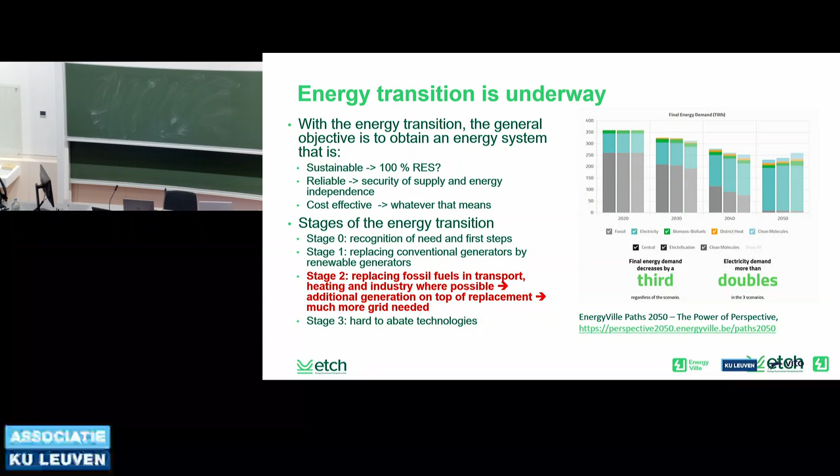If we look at what the system will look like in 2050, we'll go from a system that is currently three-quarters fossil fuels in primary energy consumption, to something that is largely electrical. It will consume less, but it will be double the amount in electrical. If you look at where we need to go, it's going to be vastly expensive—that means you have the opportunity to earn good money, but that's probably not the most important thing, although maybe an interesting side note.

Where we need to go, if you look just at the North Sea and we assume 5 gigawatt links, we get spaghetti. What we did in the past is develop the grid, because that's more cost effective, more reliable, and in the end leads to a better sustainable system. So we basically make a DC grid out of that, and then we need to import it on land as well.

For that, we need to invest for the next 15 years about 31 billion per year in transmission, just transmission. It's nice, it's good, huh?

In order to make sure that we get our undue share, as Ronnie sometimes called it, that we get more than what we purely, mathematics-based, deserve, because we are at the forefront.

Flanders actually established the Energy Transmission Competence Hub, which is part of EnergyVille. Our vision is that the future transmission system shall be multi-gigawatt, power electronics based, and underground. Why underground? I need to explain this to engineers all the time.

There are people that don't like overhead transmission. Yeah, it's the case, it's true. That being said, this is not going to be simple.

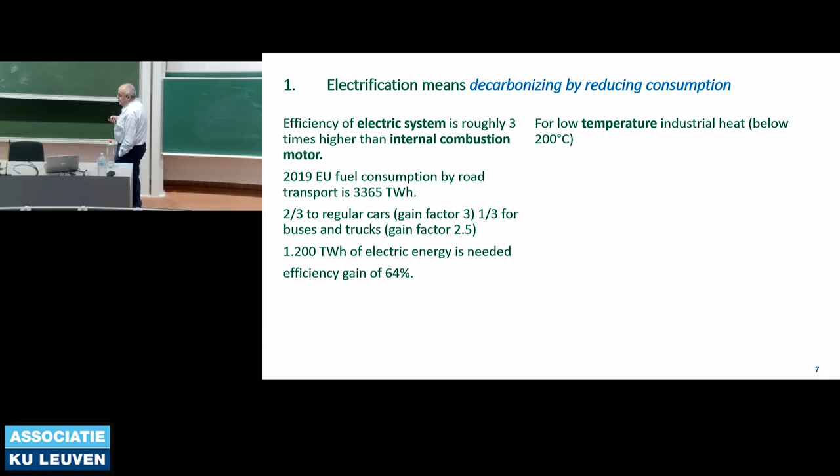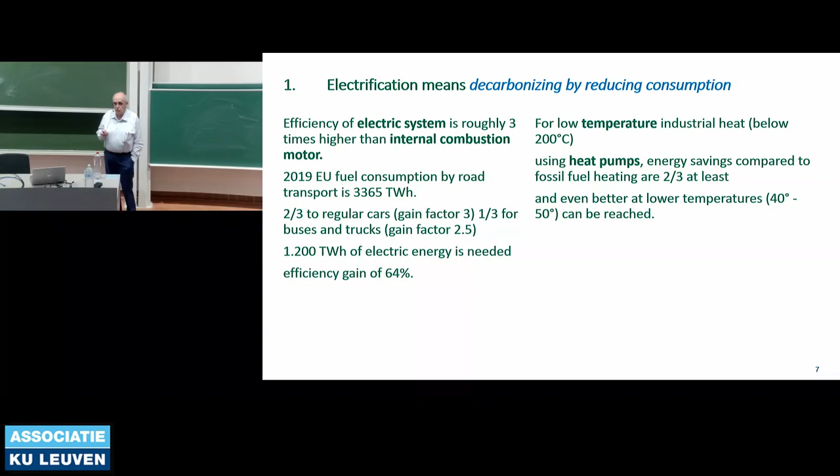So if you look at the overall thing for low temperature industrial heat, for heat pumps, using a heat pump again requires only one-third of the energy for industrial heat at 200 degrees. So again, if you only want to go to 40 or 50 degrees, for instance floor heating, you only use one-fifth. So energy-wise, if you have electricity, you use the electricity, and it's going to consume much less.

Electric cars are booming. Electric buses, trucks, no problem. A trans-European network with 1,000 electric charging points is being set up. And if you look at the whole thing, we will see it flying over the next years.

Are we going fast in Europe? The answer is no. We pretend to be fast, but it doesn't work quite well. In China, in 2022, 28% of the final energy use was supplied by electricity, and growing—it's now around 31-32%. The industry is the largest consumer in China, with 59% of the demand being electric. In Europe, and the US is lagging, we have 22% of the final energy being delivered by electricity. But as I told you, if there is a 10% difference here, you have to multiply that difference by 3 to see the reduction in fossil fuels.

So China is fully electrifying. China is consuming far less petroleum these days. And if you look at the industry, it consumes 36% of the electric energy, and it's really not enough. The electrification of the industry in Europe is not really up to speed.

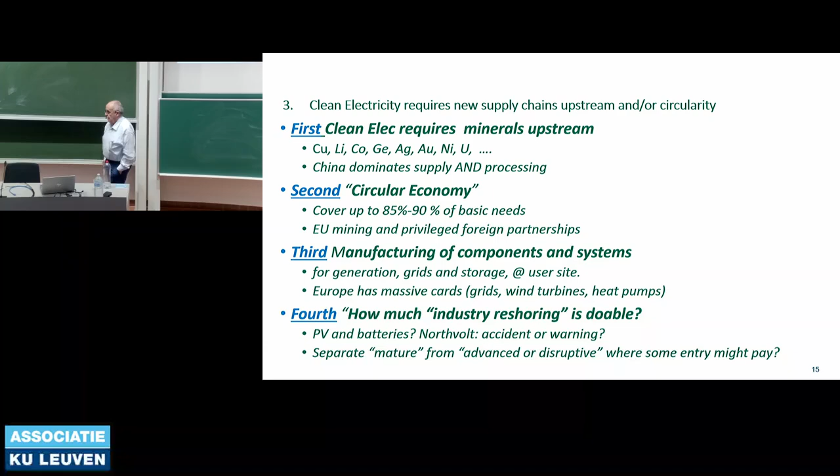So what do we need? We need minerals, minerals are there. We need circular economy: whenever material gets into Europe, don't let it get out anymore. Recycle it. That's different from fossil fuels, because once you burn fossil fuels, they are gone. With materials, you can recycle. And then you need manufacturing of components and systems.

The question is, can we reshore industry, like some people are saying? Minerals, you see number two. By the way, nuclear is also materials. Very interesting—if you look at EU statistics, you don't see nuclear energy as an input. The input is nuclear heat, because you have material that you transfer, via Einstein, into energy, and then they start counting. But look at the whole thing: all those materials have to get in. Can we do something in Europe? Yeah.

Portugal is number one in the EU for lithium and number eight in the world. So yes, we can do things ourselves. On circular economy, a lot can be recycled, but it needs a lot of investment in logistics. And we have to look at mining and foreign partners. If you want more information, let me know.

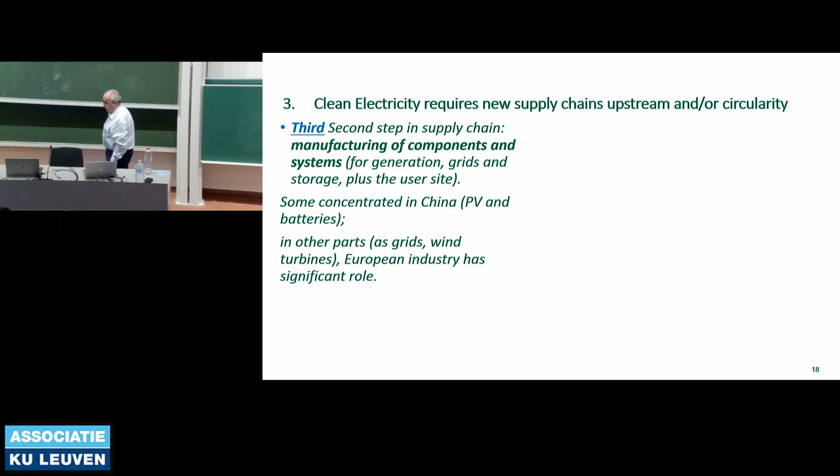We need to refine those materials, and we need to recycle them. Then the third step is the systems to be part of the grid. Batteries, we lost to China. PV, same thing. Special things can be done, maybe new battery designs, but for the rest, we are top in Europe. We have top companies with HVDC material, top companies with wind turbines and the whole stuff. Let's cherish them and go for that.

Can we do reshoring? No, not in the normal things. But if you look at the whole thing, we should separate mature PV and batteries from advanced and disruptive things. So forget that we could match China in lithium and the like, but look at new things.

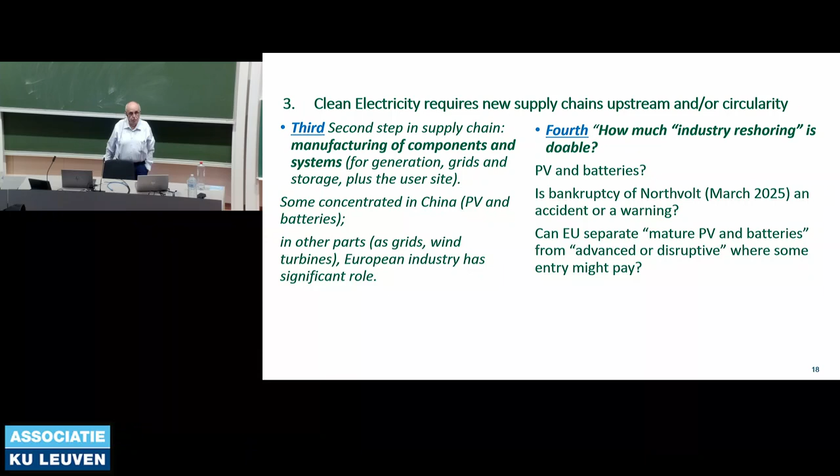Molecules. Did you hear about hydrogen? Forget about hydrogen. Why is that whole thing so popular? Because clean molecules that are made from electricity, then with electrolysis of water produce hydrogen, combined with CO2, producing methane, methanol, or anything like that—it looks very easy because people know what it is about.

They are used to using gas, petrol, kerosene—so it's always the same. And all the lobby of fossil fuel addicts are saying to the politicians, there's no problem: we will produce, with the surplus of renewable energy, hydrogen, and everything remains the same. Some bus manufacturer in Belgium learned that lesson too late.

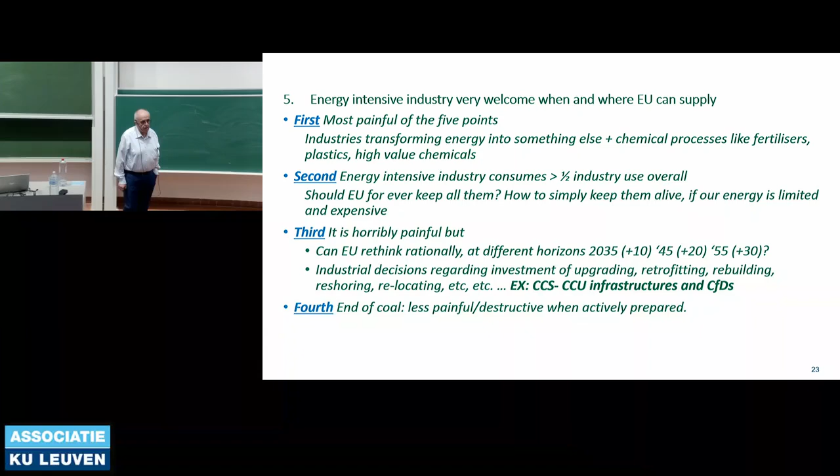And then, can we have that energy-intensive industry? It's horrifying, and the answer is no. We need to change the industry fundamentally. We cannot really compete worldwide in a global environment with basic products that don't have an awful lot of added value. No way. This is going to be hard, but it's not for me to decide.

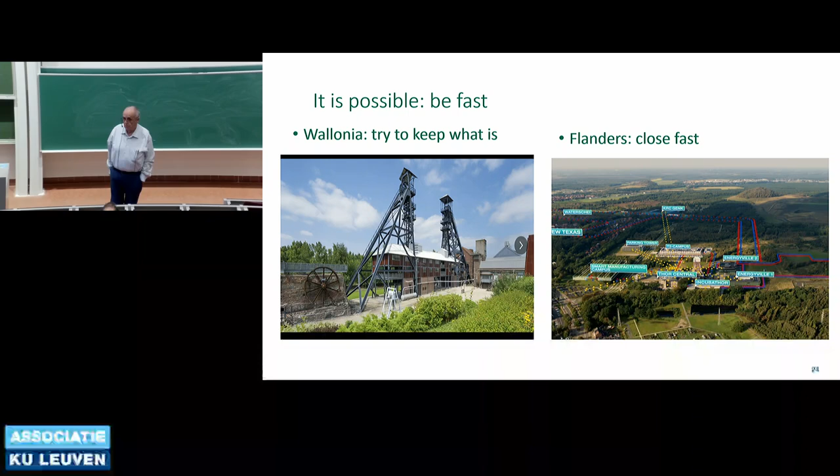Here you see two coal mines. The left is in Wallonia, Belgium, where they kept the coal mines open as long as possible, spending all the money in keeping up the coal mining work. On the right-hand side, you see Waterschei, Genk, where EnergyVille is. The Flemish part of the country stopped the coal mining as fast as possible and left over money to do new things. So this is not fun.

If you look at the whole thing, you see steel, aluminium, cement, etc., chemical industries like fertilizers. Probably not. I've done this work together with Jean-Michel Glachant, who is coming from the north of France.

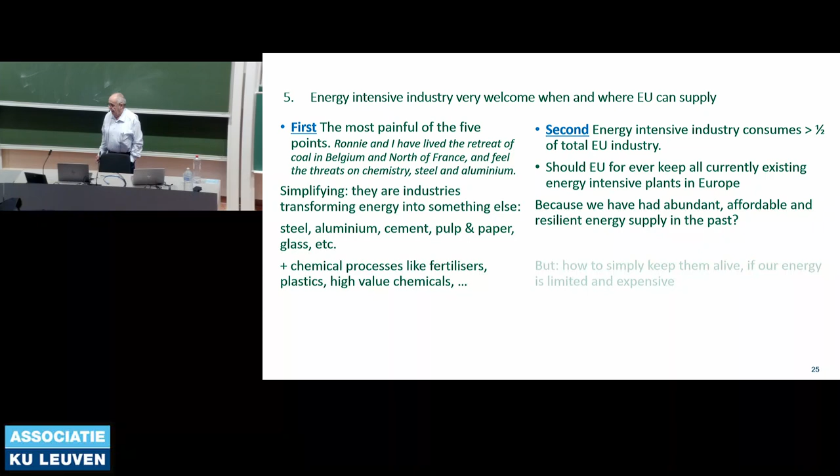We are now in the cycling season. Next Sunday you have the Tour of Flanders, and the week after is Paris-Roubaix, where all the old coal mines were in France. So we need to make that transition, and that transition is going to be painful.

We can do an awful lot of things, still one investment cycle with CCS, carbon capture and storage. We can then try to use in steel some bio-based steel, and the rest we have to do electrically with secondary steel. I'll come back to that later.

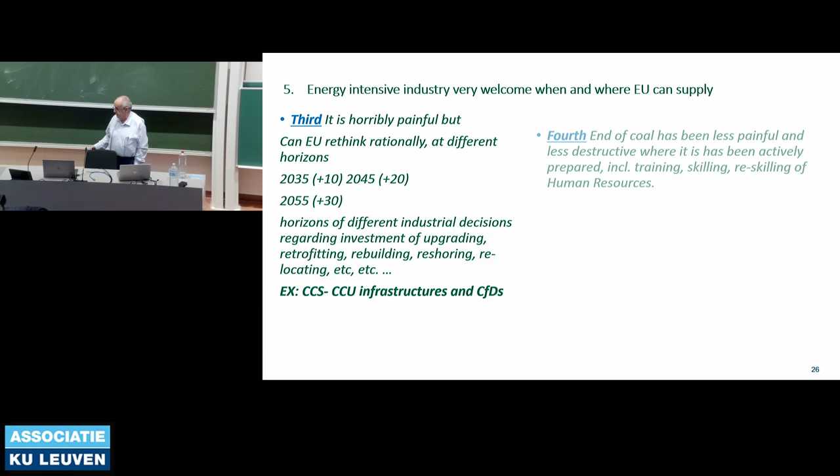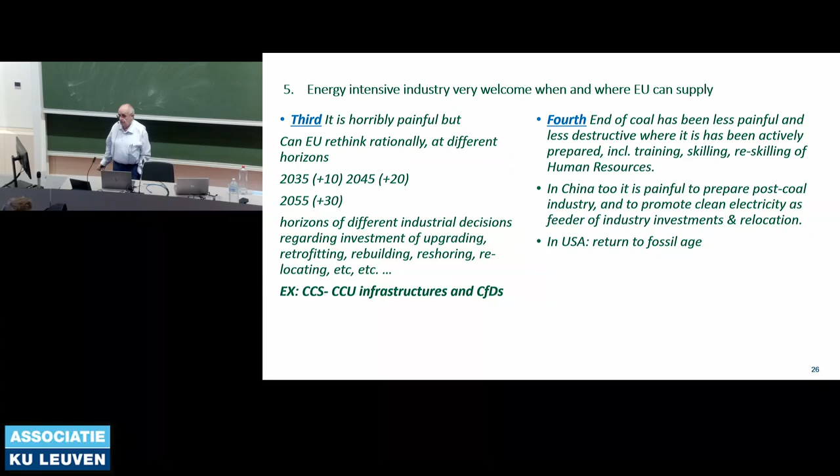So we need to do that. We have to retrain people. In China, it's also a very difficult part of this, the old post-coal system, but they have taken the route to electrification already. So the only thing we can do is try to do that as fast as possible.

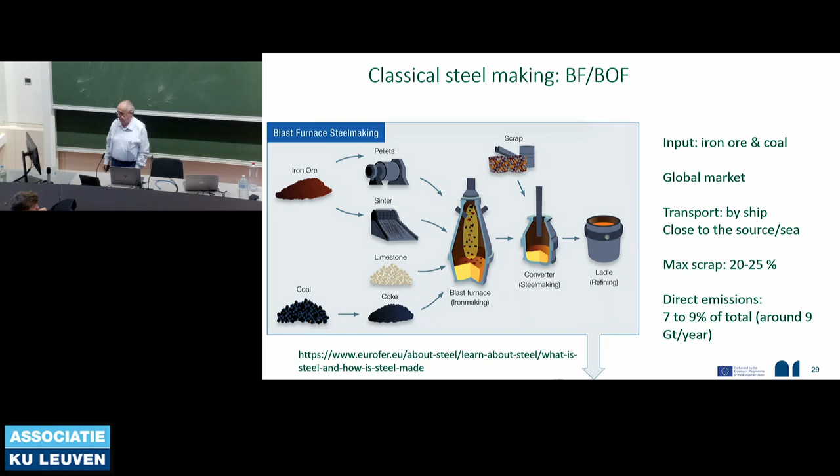Give me now 5 minutes, I will give you an example. Steel. Steel is now produced from coal and iron ore. You put it in a blast furnace, you put oxygen with it, you put some scrap with it, recycled steel, and 20 to 25% can be scrap, the rest is basic iron ore. Total emissions are around 9 gigaton per year worldwide.

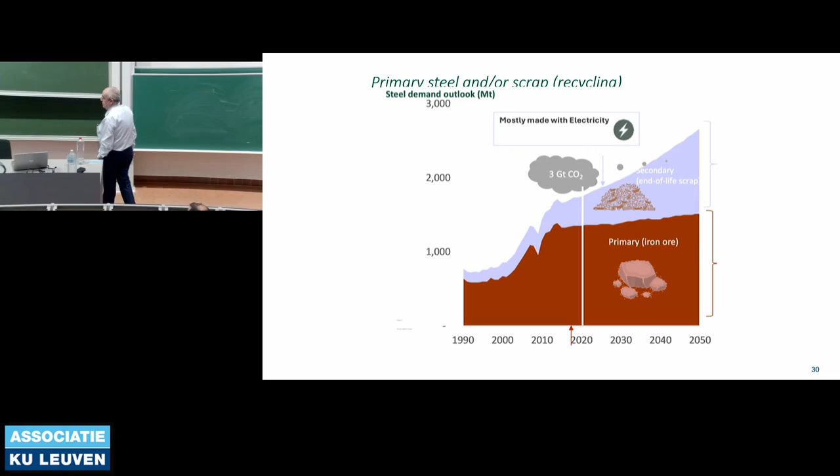How is steel going to evolve? You see it very nicely: the primary steel is going to be constant over the years, but more and more steel is going to come from recycled steel, which can be done electrically. So in Europe, we should turn our attention to the top part and not to the bottom part.

If you look at scrap, you see how it can evolve. It's already available, and it will be growing. An electric arc furnace, EAF, can use up to 100% scrap, but not for top steel, for a car body or something, for easy products. If you have top products, it can be up to 65%.

What can you do? You can have natural gas input instead of coal, and then you can put CCS on it, carbon capture and storage, and combined, it gives you a reduction of 90% of CO2 emissions compared to the classical way of doing it.

We are here in the electrical engineering department, and there is a very nice number under it. If you compare the electricity consumption of the left-hand approach with the electricity consumption of making steel now, it's a multiplication factor of 4 for the same amount of steel. Now, if you want to do it really the good way, doing the reduction of the iron ore by hydrogen, you see it on the right-hand side: you use 12 times the amount of electricity that we have now.

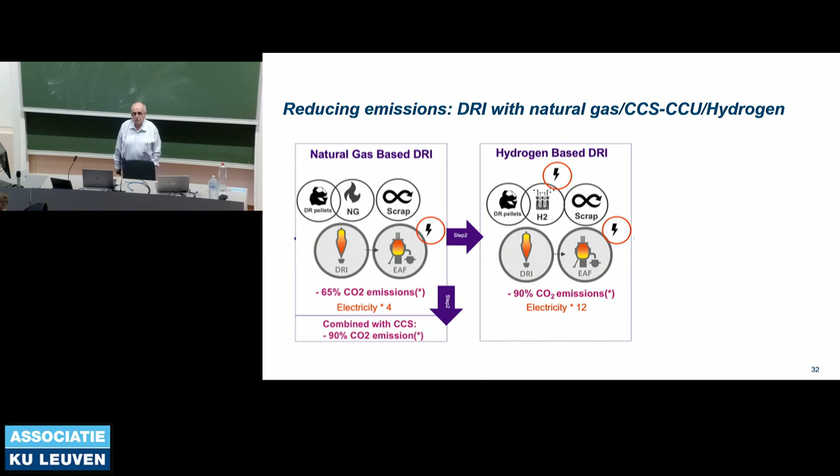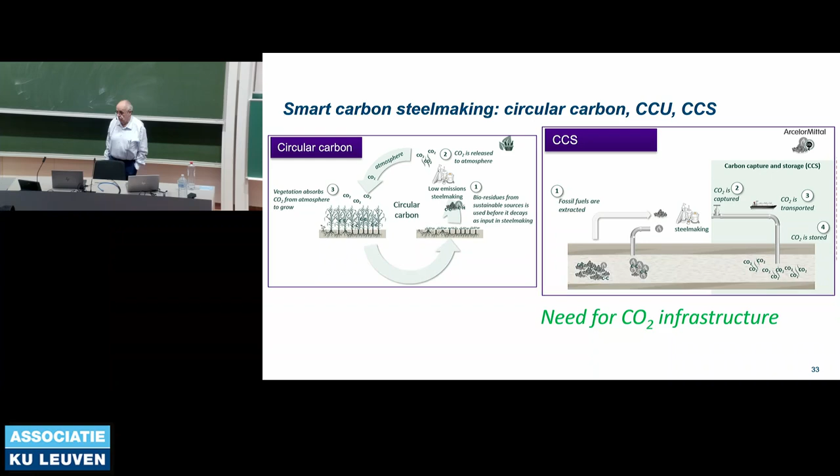No way of doing that in Europe where there is a reduced amount, not a big amount, of renewables. So the local prices of electricity become important. If you look at the whole thing, and if you want to do CCS, carbon capture and storage, you need a CO2 grid, which will be local. So, ladies and gentlemen, on the left-hand side, you need biomass. It's going to be a very interesting future.

General conclusions: things will not be the same, and we need to make that transition as fast as possible, as fast as acceptable by society.

Electricity is always the best way to go, but electrification is slow and demanding because it takes an awful lot of investment. Clean molecules, as I told you, have their role, but it's limited, and the energy-intensive industry is very difficult.

We presented this at a meeting where there were a lot of Italian politicians. Jean-Michel and myself wanted to put some questions there, and I want to repeat this for any group of politicians that you like.

Are you really willing to do electrification at the center? Are you supporting high voltage lines, etc.? Are you willing to enable the industry that does that? And are you willing for this group to put education and re-education at the center? By answering those three questions, do you want to push the industry to go that way?